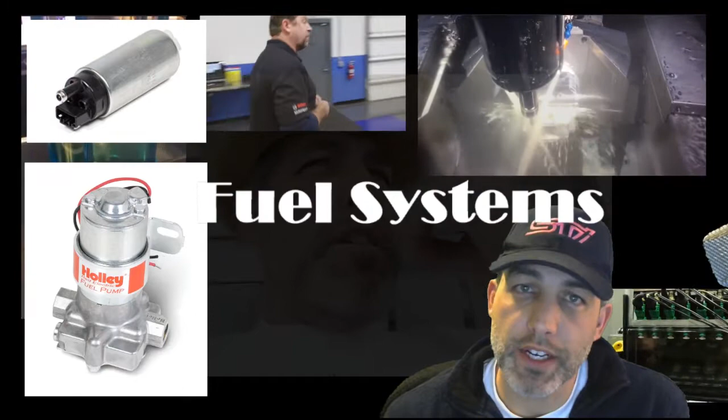So let's talk about the first part of that system, and that's fuel pumps. Fuel pumps, there's a couple types. There's in-tank and external. I have pictures of some representative ones here; there are obviously many shapes and sizes based on what's going on. The top one there would be in-tank. The bottom would be an external inline fuel pump.

And those fuel pumps can also have other traits inside them. The method by which they move fuel can be different. In an old school Walbro 255, for example, it's a gear rotor pump. It physically moves fuel via positive displacement by the difference in volume between two gears as they rotate, much like the oil pump on many cars, Subarus and the LS series and that kind of stuff.

The other style is a turbine style, and the turbine styles are basically like a centrifugal pump or a propeller on a boat, or even the turbine in a jet engine. So the turbine style rotate a lot faster because they're not doing positive displacement. They're not grabbing a volume of fuel and moving it. They're slinging it. If you've ever seen a propeller and you put a boat in the water, you can mash the throttle and the boat doesn't go anywhere instantly, right? There's some slip there.

And the turbine ones and the gears both have pros and cons to them. The gear style, being positive displacement, isn't very good for throttling flow. If you run the pump at full speed and your injector demand is really low, that means you're putting more fuel than the engine needs, and the regulator has to open a lot. And if you run a gear style pump that's bigger than the regulator can bypass effectively, then that would be what's called regulator overrun.

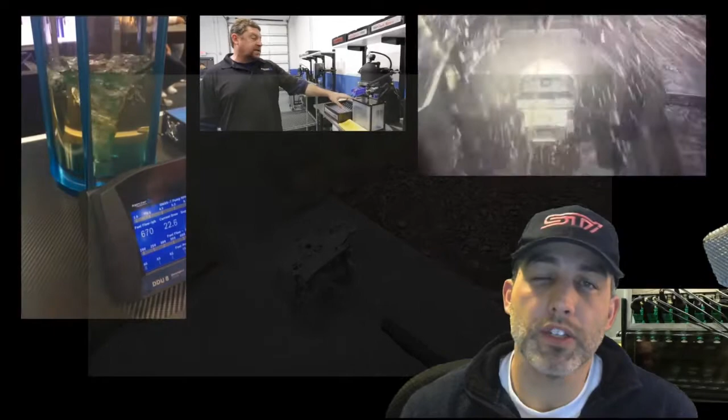So if you take a GR and you put ID1000s on it, then you run into a leaning trend, typically 2,500 to 3,000 RPM, at a medium load, somewhere around atmospheric pressure, sometimes a little less, a little more, where all of a sudden it just starts going lean and you got 25% correction, you're adding fuel to some of the compensation tables, and it's still lean, and then you got 50% fuel on it, and it's still lean, and you can't tune it out. That happens. Sometimes you can tune it out though, which is what's weird, right? Like, why is it different?

On 1300s, you almost can never tune it out. 1300s is pretty much going to be a lean spot that you can't get out, and you can add dampers to it, and you can change the reference of the fuel pressure regulator. I've even put two regulators on a car before, trying to fix it. And the only thing that fixes it is putting larger rails on it.

And then with the 1000s, like I said, sometimes you can tune out really well, sometimes you can't. And what's the difference? Well, what I have found is that if I put 1000s on a car with a stock fuel pump, now you might say, why would you do that? Well, sometimes people have their VF series turbo and it runs into boost creep, and they don't want to go with an external wastegate setup. They just want to have the extra fuel there. So if it creeps a little bit, hey, I got the fuel there, it's not going to run lean.

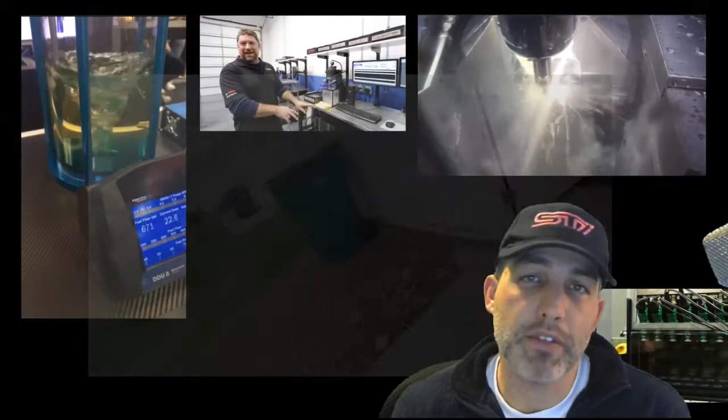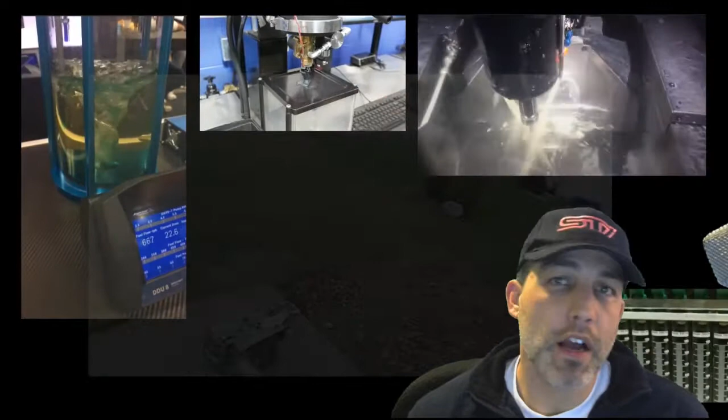And since your total fuel flow is only really going to depend on your total airflow, you don't need a bigger than stock pump on a VF turbo. You just don't. What I've noticed though is that the stock pump cars with ID1000s have less hesitations. They're easier to tune out. Well, why could that be? I thought about it for a while.

Engines run on inertia. So many things in the way an engine runs are inertia. Even the air in the intake manifold, right? Air has mass. You go on the highway, you put your hand out the window, you feel it blowing on your hand. It's your hand trying to accelerate the weight of that air. And that air has inertia, has weight, has mass, and it pushes back on you. Well, in the manifold, it's got mass too. And when the intake valve closes, that air that was moving hits this closed valve and bounces back, and you get these pressure waves in the manifold.

Well, fuel's no different. Fuel per volume has way more mass than air does. So now I have, we'll say, a stock fuel rail, which has a really small diameter. If I have a really small diameter and a high flow rate, the fuel is moving really fast through that small diameter pipe. But a stock fuel pump has a lower flow rate than the aftermarket pumps. So while the fuel is still moving fast through that rail, it's not moving as fast as with an aftermarket pump. And now I have this big injector with a really small pulse width at idle or at low loads. So I take this really fast moving fuel and I go and trigger this injector.

Well, that fuel's got a lot of inertia and it's moving in one direction, and I'm trying to get it to change direction to go down into the injector. That change in pressure that occurs when you try to change the fuel direction creates a pulsation in the rail, and those pulsations stack up. And if you hit a certain resonance, like any tuner has seen, between 2,500 and 3,000 RPM, you see that hesitation occur. Something to do with that pulse width and the speed of that fuel creates hesitation.

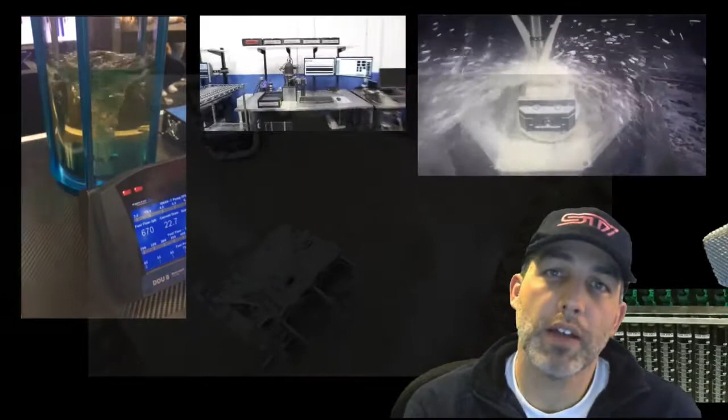So, moving on from cavitation and pulsations, let's talk about injectors. Injectors, again, are important. Having the proper atomization at low pulse width is really important. Getting an injector to flow evenly at high flow rates near their peak flow rate, that's easy. That's not a hard task. What's hard is getting an injector that flows a lot at full flow rate also to flow the correct amount at a low pulse width, at a low flow rate. And that's where some injectors set themselves apart from other injectors.

I'm a huge fan of ID. They're the first manufacturer of injectors to ever measure an injector way down there at the low pulse width area. And why is that important? Well, honestly, your engine doesn't spend the whole time at full throttle. It spends most of its time idling or cruising. So wouldn't you want an injector that was balanced down there in that region? Because it ain't as easy as you think.

It just isn't. And there was a time when RC Engineering was a popular injector, and they had those big body Bosch injectors, and a 550cc injector seemed like a big injector. And even then, those things were a nightmare to tune. You often couldn't even get the engine to idle at stoich evenly because one injector was flowing way more than the other at idle. Now we're running 1300, 1700, 2200 cc injectors on cars at idle. And in order to do that, you've got to have precision, and that's why I prefer ID for that. Again, I don't want my videos to sound like endorsements or product reviews, but that's just one of those things where, for me, it's ID or nothing with injectors.

Rails. So we talked a little bit about larger rails, slowing down the rate of the fuel through the rail. That's really important. Some aftermarket rails are really small in diameter, and they don't aid in eliminating the pulsations at all. Now, there's also different ways of hooking rails up. There's been the big debate, series versus parallel. I was a big series fan. I was a series fan because Subaru did it that way, and I believed in the logic by which they used to do it.

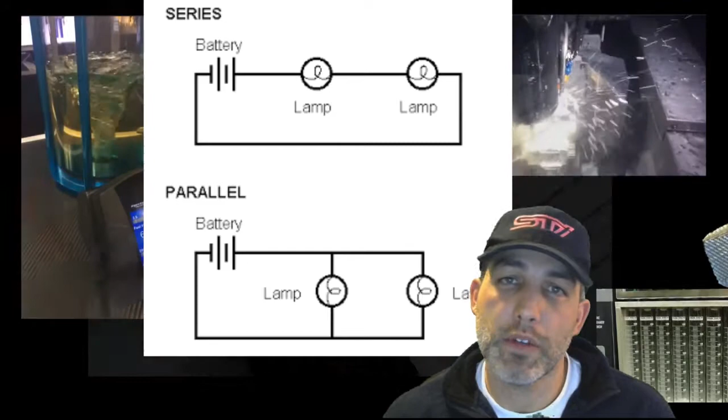So at either time, neither of them should really be affected by the other one and how much fuel is drawing or electricity is drawing. Parallel is really cool. It works pretty well, and it's super common on V8s because in a V8, the firing order is not in a straight line. In the Subaru, it's in a straight line, 1324, right? That is the direction that the fuel is flowing right down the rails. And so for that reason, the series is more forgiving in a Subaru.

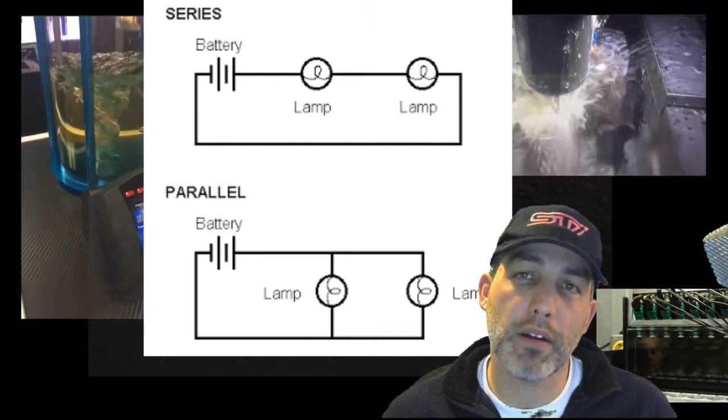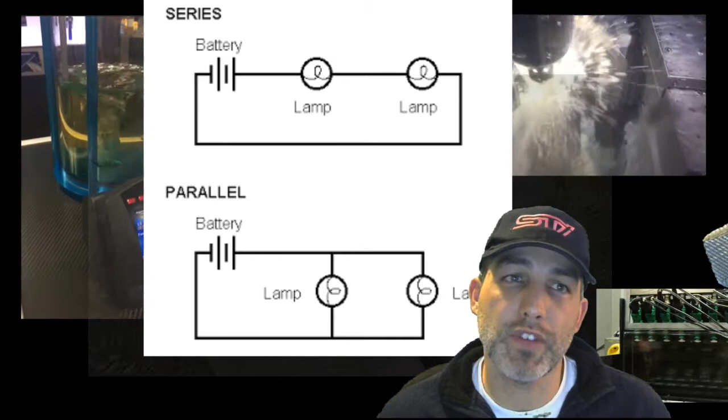And like I said, I like it because it means the same fuel is running through both rails, which helps keep the temperature the same and that kind of thing. Whereas if they're separated in parallel, then different fuel is run through each of them, and you can have a different temperature in the fuel rails. And that was something I tested a long time ago, I think '09 actually, and I found that to be true by 15, 20 degrees, and started seeing a lot of injector issues on one side. And so that was the reason I like to keep the fuel in series.

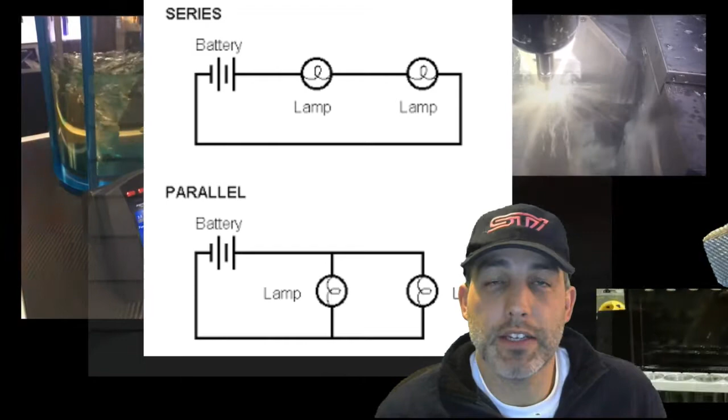But as injectors got bigger and as cars are making more power, it's just not working out as much. So sometimes I'll go parallel. It just depends on the system. And which one's right for you? Again, that totally depends on your fuel system. If your rails are big enough in diameter, then you can go series. Series is great because it requires less hoses, less adapters, less fittings, and that kind of stuff.

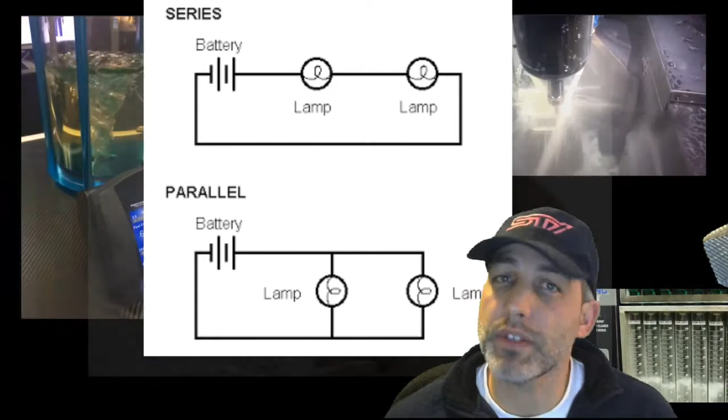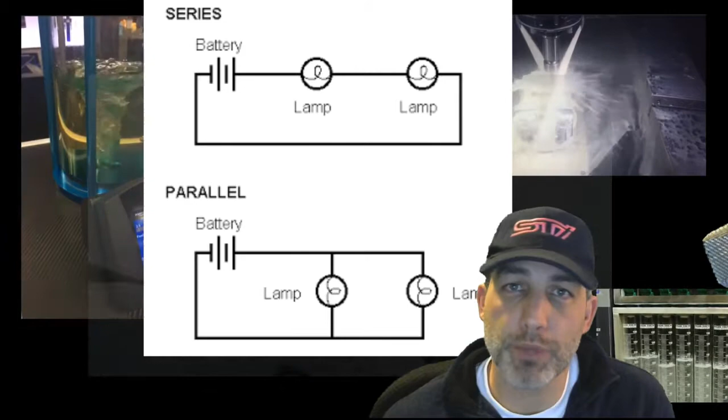If your rails are small diameter and you're finding yourself dealing with issues getting fuel to the injectors, or you're running so much horsepower that 2 injectors or 3 injectors are enough to empty the rail out, which would really be something, then you may find that parallel works for you. And so I can't tell you which one is better. I like the simplicity of series, and there's some good reasons to use it. And there's good reasons to use parallel as well. So, like the fuel pumps, I can't tell you which one's better because it totally depends on which pro or con you're going with.

Now, what happens when you are no longer able to put enough fuel pump in your gas tank? Well, the GD series and GR series for a long time were limited to one fuel pump in the tank. And then some companies made a dual pump hanger, but the fitment was really poor. There was no surge tank capability. The wiring was a nightmare. They were prone to leaks. Hooking it up mechanically, hooking up the fuel lines, everything just required a lot of modification to the car. And so a lot of people would go with a surge tank.

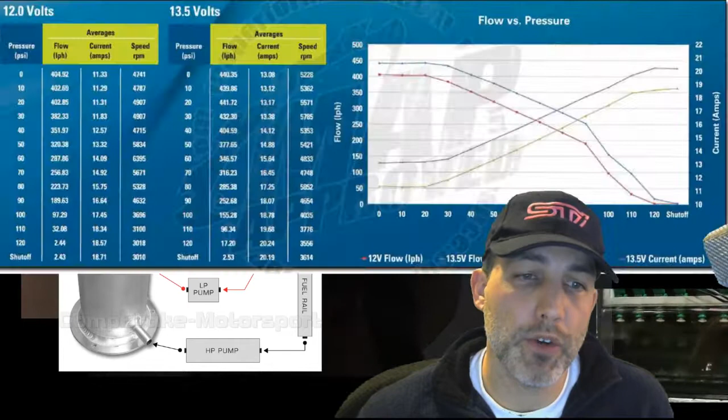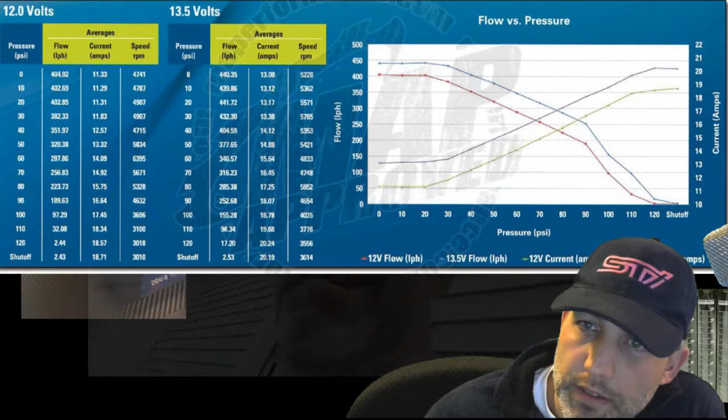And to show that, I have this for you here. Here's a chart that shows you pressure along the bottom there, and the flow is the y-axis, and you see the graph. So you see you have a decline in fuel flow as pressure increases.

So let's say your base pressure is 43.5 psi, and you can see that at 13.5 volts, at 43.5 psi, I get right around 400-ish liters per hour of flow. But then as boost increases, fuel system pressure also increases, usually a 1-to-1 scale on most cars. And so if you ran 20 pounds of boost, now you're at 63.5. And you can see, looking at that chart, if you follow it up, it's around 340 liters per hour. So you've lost 60 liters per hour in flow rate because you've raised the pressure.

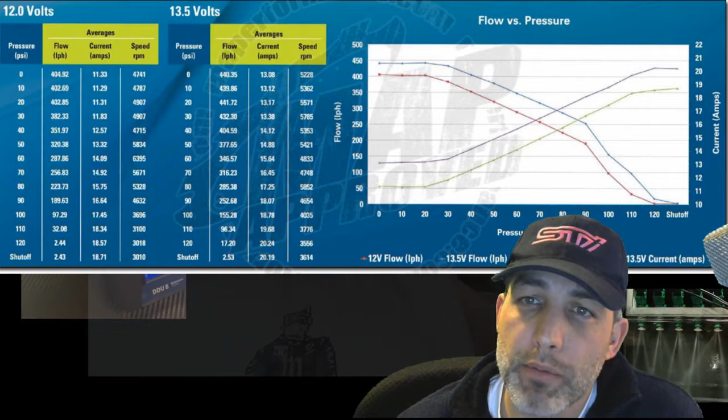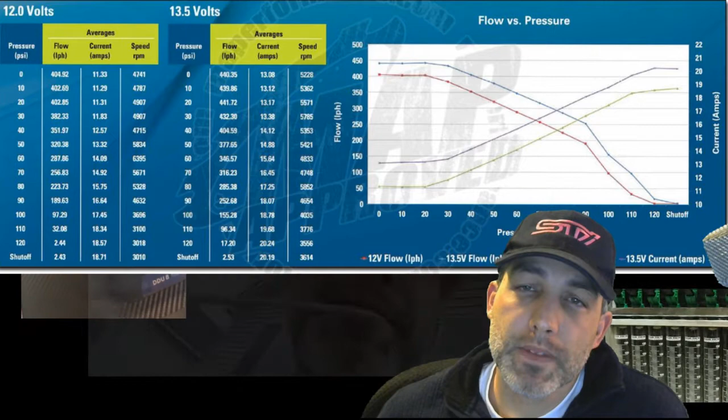And so if you're running a high horsepower car, you may find yourself in need of 2 fuel pumps. It's because the fuel flow drops so much as pressure increases that you actually need 2 of them. You're no longer getting 450 out of the pump. You're getting 300 or 280, or in this case 250 if you're at a 90 psi fuel pressure.

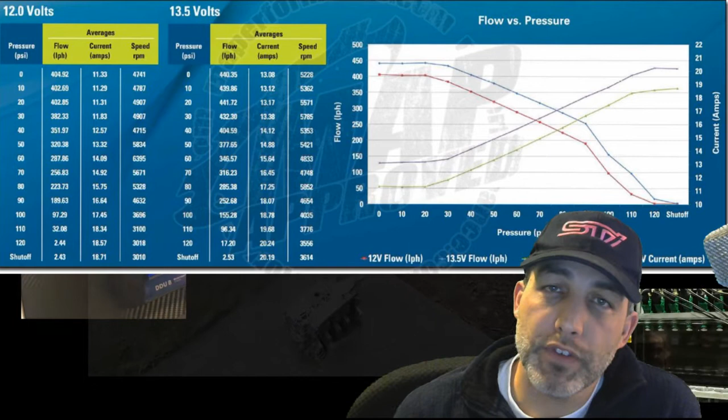So what you can do to help with that is you get a surge tank, put 2 pumps in it. But you only need 1 in the tank because the 1 in the tank is staying up at the 450 mark. And sure, at full throttle, you will draw more fuel into the engine than that single pump can provide. But that surge tank has a volume there, and with that volume, you have time. You couldn't do a nonstop throttle pull for 5 minutes because you'd drain the tank and eventually run out of fuel in the engine.

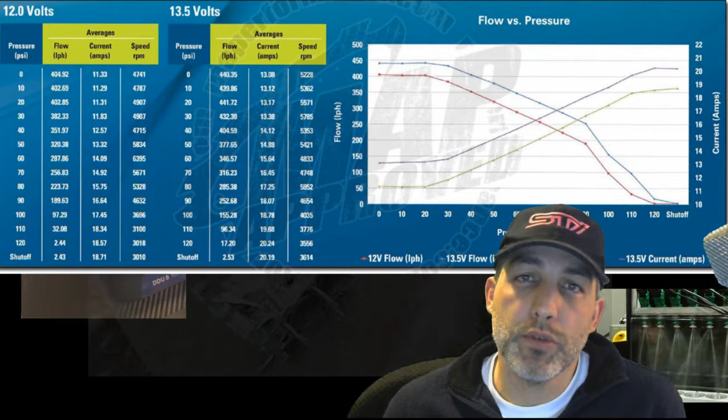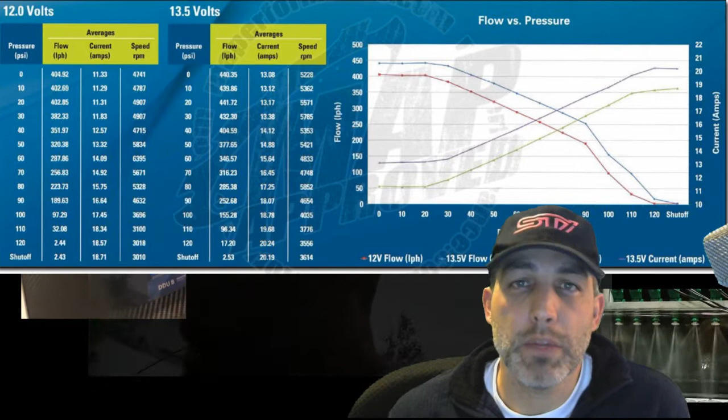But people who race let off the throttle. You shift gears. You slow down for a corner. All those times when you reduce the fuel demand, the primary pump is able to refill that surge tank and keep it going. Obviously, it's important to make sure you have enough fuel flow and you don't drain the tank. But what you find is that now I have this 450 pump. It's always doing 450 because I'm only pumping it at 20 psi or 10 psi into a tank. And I only need those other 2 when I'm in boost at full throttle.

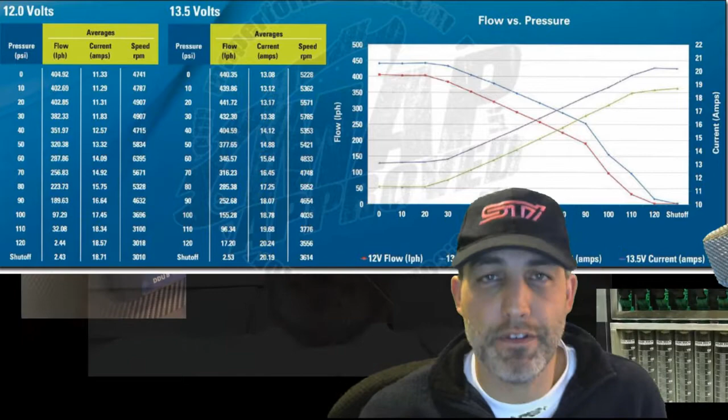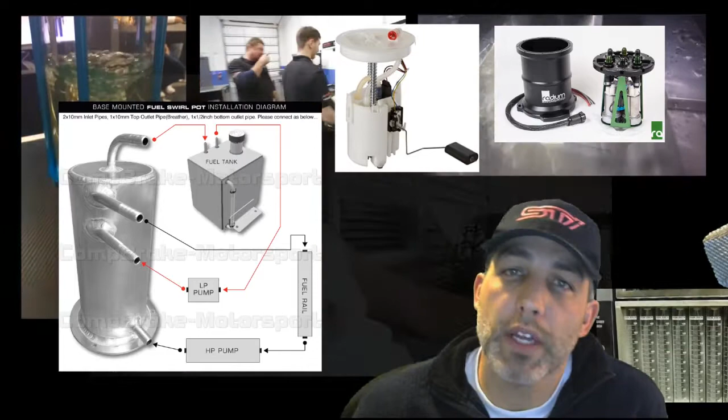So that's a really good thing for somebody. If you find that you can't fit enough fuel pump in your tank, then you get a surge tank, and then just put a nice big one in the fuel tank, the biggest you can fit, and usually it's enough to keep the surge tank full for most situations. So now that surge tank is filled. Like I said, it's low pressure. You have 1, 2, 3 pumps in it that are larger, flow more, and then those will feed the engine.

The return flow from the engine goes back into the surge tank, and so at all times you're trying to keep that surge tank full. The overflow from the surge tank goes back to the fuel tank. So even when the fuel tank is going down, the surge tank is always staying full. The primary pump in the tank is keeping the surge tank full, and then the return flow from the rails goes back in the tank, hopefully keeping it full.

How big of a tank do you need? Again, that totally depends. If you find that you can't put a big enough pump in the tank and you need more reserve capacity, then you need a bigger tank. If you need to put more fuel pumps in there, you need a bigger tank to fit the pumps. The more pumps you have in there, the quicker you can empty that tank. So the tank size is important based on your fuel demand. And you can do some math and calculate what it's going to be.

You're going to need to know the actual flow rate of your fuel pump and the pressures you're going to use, what your peak boost is going to be, see how much fuel you get out of the pump, compare that to your injector size at 100% duty cycle, provided you even hit 100% duty cycle on your engine, and then back calculate from there how big of a pump you need. And then if you have a difference in the supply of your primary one to your secondary one, you find that difference in flow rate and you can calculate how much reserve time you have in the surge tank if you were to never let off.

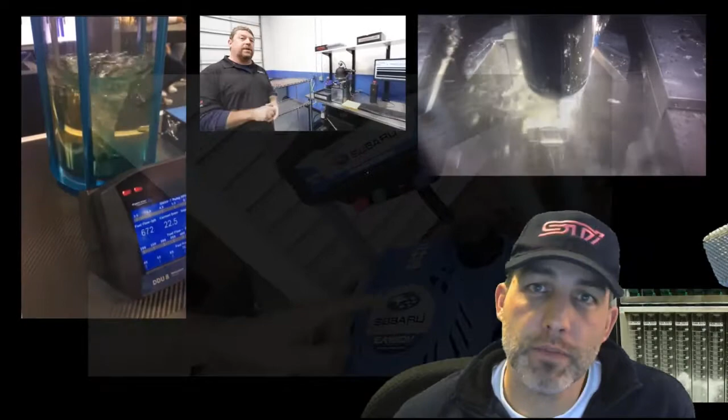What that means really is if your cylinder volume is the same, you need that much more fuel to meet that ratio demand. And so if you're trying to run a flex fuel system, you need injectors that are large enough to satisfy the increased fuel demands on ethanol, but also small enough that if you're on full pump gas, they can actually modulate the injector properly at those low pulse widths and get the fuel balance to the cylinders.

And so it's really important that you don't go too big on injectors, because if you care about idle and cruise and that kind of stuff, and you need to run full pump fuel, then you're going to find in a lot of cases 17s are even too big.

And some cars are different, but if you have a bigger cam, then that means that the intake valve closes later in the compression stroke, which means really your engine displacement is less at idle, and so you need even less fuel in the engine, which means that a big cam car will be harder to get to idle on 700cc injectors than a small cam car.

I talked earlier a little bit about fuel pressure regulator overrun, and that's where the fuel pump has more flow than the regulator can bypass, and that results in an increase in fuel pressure. Even if you don't experience overrun, I also mentioned that as the valve opens to control pressure, that pressure still goes up some because the spring is going to compress, it's going to stack, and you're going to get a rising fuel pressure regardless with bypass rate.

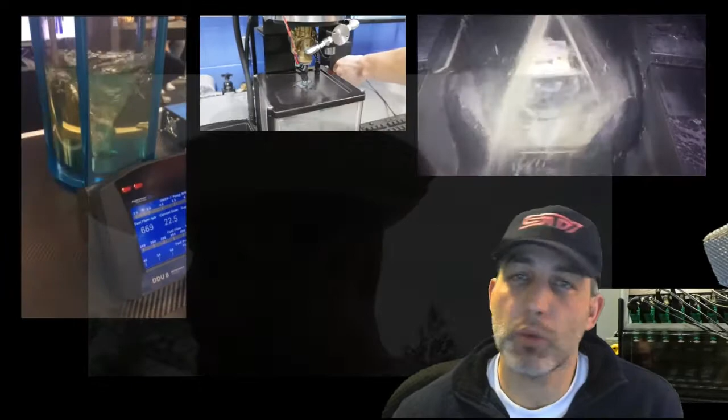However, if you're on a regulator with a really small disc, which is the actual sealing surface in it, or you are using so much pump, the regulator is having a really hard time. That means you're having a really wide range in how much that disc has to open and shut. And if that's the case, then your pressure is going to oscillate a lot with changes in fuel pump speed. And so a very often overlooked upgrade is a nice fuel pressure regulator.

The Aeromotive one is really common. The 13109 is a common regulator that's used, and that's good. But sometimes you need a little more. Sometimes the Aeromotive by itself just isn't enough, and that's where you've got to go to the next size up Aeromotive, where they have the larger disc and seat.

And so if you go through their website, you can find the ones for fuel injected boost referenced systems with larger seats. Other people also make regulators. Fore Innovations, again, I mentioned them when I was talking about fuel filters. They make one that I like a lot. It has a bigger seat in it, and I find that it does a really good job of controlling pressure.

So don't overlook your regulator. Don't rely on the fuel pump controller, especially as you get more and more pumps added to a system. It's hard to get a controller that can handle the current associated with the larger pumps, and so a lot of people end up bypassing the controller and running the pump 100% power all the time anyways. And so for that, you definitely need a regulator that's able to bypass the fuel flow and preferably not be struggling or near the end of its range when you're at peak fuel flow.

Because when those injectors start pulling fuel out, that regulator starts to shut, that spring relaxes some and your pressure's going to drop too. So it's really important to find a regulator that's large enough that it's not struggling to hold back the fuel, but not too large where it can't maintain pressure at the low flow rates. So please go larger. If you're running more than one fuel pump or if you're running a single 450, there's nothing wrong with going with a regulator that has a larger disc or ball based on what kind of seat it is in the regulator. It's beneficial for sure, and it's something that's often overlooked.

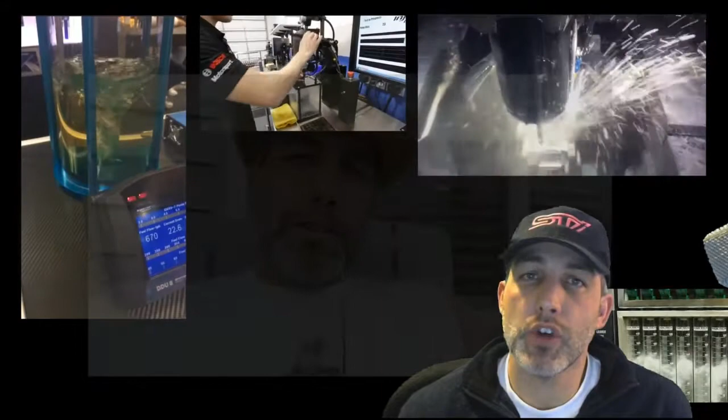What's also really cool is a lot of those have bungs in them, and they're usually 1/8 inch NPT. If they have multiple ports, more than you need for your fuel rails or feed, you can also tap into those with an adapter that goes from like a dash 10 to 1/8 inch NPT or whatever, and you can put fuel pressure sensors in it, fuel temperature sensors. Works really good with the Cobb flex fuel setup or any aftermarket EMS that uses fuel pressure compensation.

You can put that right in the regulator and add fuel compensation tables so that if your pressure is less than target, which would mean you're not getting as much fuel as you should be getting, then it'll see that the differential pressure across the injector is low, and it'll add in extra pulse width to the injectors to try and make up for it. Now, if you're just at the end of your fuel pump's capacity, well, increasing the duty cycle on the injector is just going to lower the fuel pressure. If it's a situation where the regulator's using too much of its range and it's not controlling the pressure well enough as things change, well, that's awesome because that fuel pressure compensation could then adjust for that.

What you can also do, and what I do on a lot of cars, if the fuel pressure gets too high or too low outside of a certain band, I have it just cut fuel. If the fuel pressure becomes 30 psi less or 20 psi less than target, then it's adding pulse width to it, and the pressure drops below that threshold, and that tells me that the pump can't keep up. And the best way to save the motor then is just go negative 100 on the pulse width on the injectors so that it turns off those cylinders. It's not lean, there's no fuel in it. If it's just air, then you can really protect it.

So what happens is the fuel pressure compensation tables look like a Z. You have a 0, then it pops up to adding a lot of fuel, then dips down to when the pressure's high and it's pulling fuel, and then you get to a point where you can either just put it at 0, leave it there, so that on both ends it's that, or you can try and do it another direction with it, add a bunch of fuel, whatever you want. I prefer to just go to 0 and save the motor. That's just a little pro tip for you there.

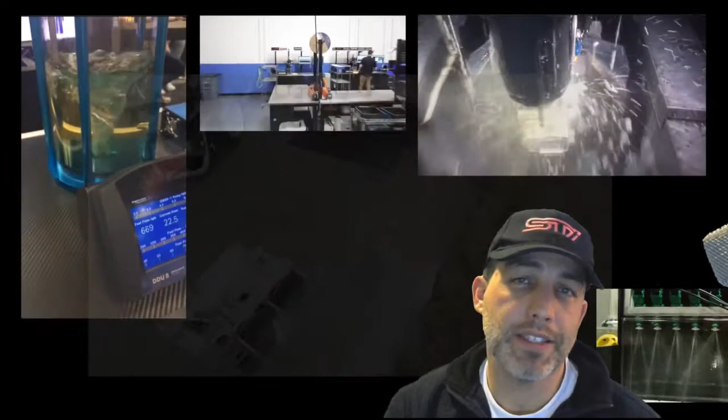Minimizes the need for having a surge tank. Surge tanks take up space. They can be in the trunk of the car, they can be bolted inside the transmission, they can be in the engine bay. Somewhere you're running wires, running more fuel lines, and dealing with a lot of that stuff. And if it's not a track car, if it's a daily driver, or even just a weekend car, you might not even need any surge tank element. You're not hanging high G turns sustained for any period of time. You're not racing with a quarter tank of gas or whatever. You don't need the surge tank. And so it's nice to be able to fit fuel pumps in the tank themselves and not need a bunch of extra stuff somewhere in the car.

So if you got any questions about fuel systems, I hope this helps some. I know that some of it's very generic and vague, and I can't tell you, definitely run this, definitely run these components when it comes to fuel pumps and regulators and that kind of stuff.